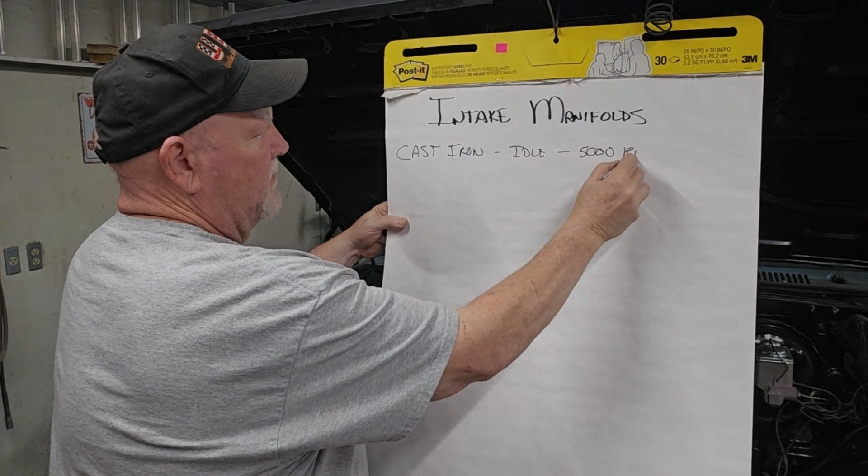It was idle, no matter what it was, to about 5,000 RPMs, and that was your power band. It would run smooth all the way up to about 5,000 RPMs, then it would fall off on its nose, because that's the limit of its range. If you're on the street, back in the day, that was really good. It idled good, it was smooth. You put a pop can on the breather, it was nice. But it wasn't very efficient.

As we all know, an engine is just a big air pump, so if you can make it flow better going in, that's going to make more power. So your first range is going to be something like Edelbrock Performer, whether it's a spread bore or a square bore from the factory. But that's just a first step, entry level intake manifold, and it's a good performer.

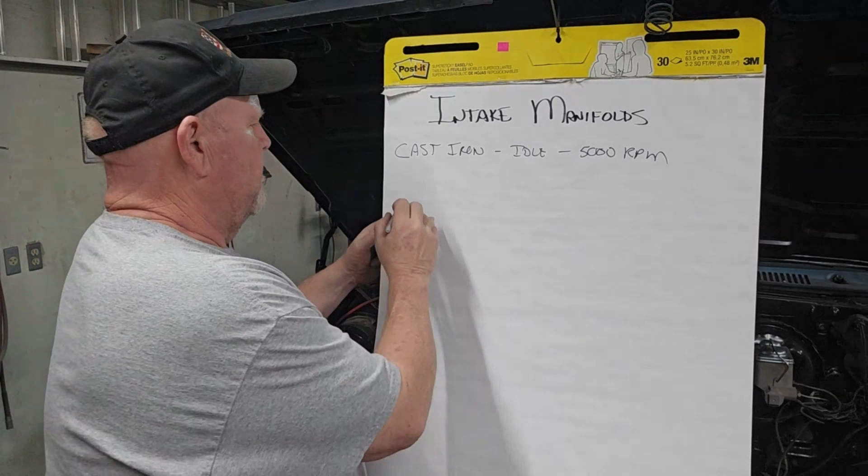All the companies have one of these. It's a split plenum, so it splits it in half, and it feeds half on one side of the carburetor and half on the other side of the carburetor for a 4-barrel. It just kind of crosses them over, and it's good for low end use.

So a performer style, a dual plane, is going to run good from idle to about 5,500 RPMs.

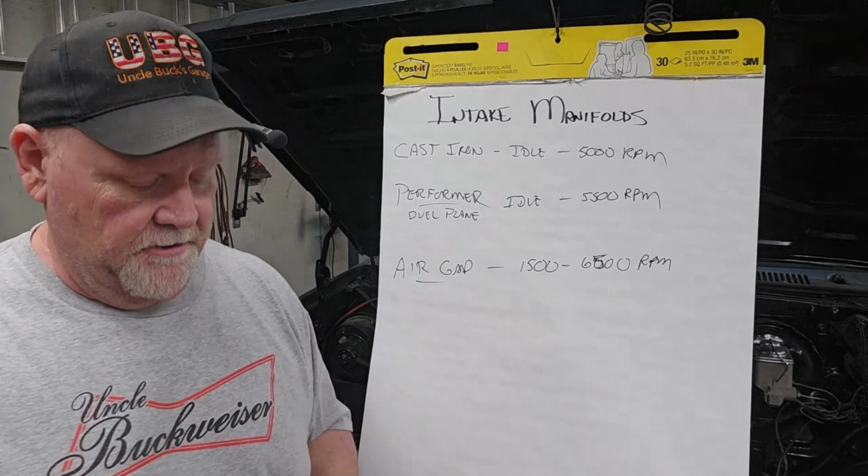So idle to 5,000, idle to 5,500, 1,500 to 6,500. Which if you're running double duty, running on the street and running on the strip, and running a big cam, then you're probably going to want to go with air gap. They're not bad intakes, I've had them too.

Those are definitely, when you swap them from, say, the cast iron, you go straight to an air gap, you're going to notice it on idle. You're going to notice it taking off because it's going to be cumbersome. It's not going to be crisp, it's not going to be clean. You're going to have to do things with the carburetor to get it to work.

There are going to be drawbacks to going that high of an RPM range on the top end. Now, once you get past that and you're cruising, it comes on like gangbusters, and it really works well. But again, if you want nice cruisability and idle quality, this would be the way to go. But if you want something a little bit hotter, then we'll go with the air gap.

All right, the next one we're going to talk about is an open plenum. My preference—they all make them, Holley makes them, Edelbrock makes them, Victor Juniors—but my favorite has always been Weiand. Weiand Team G's have been my go-to for 40 years.

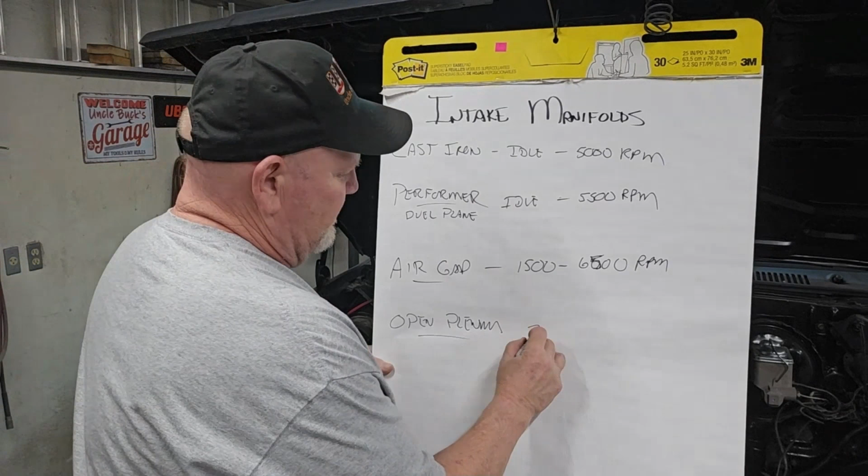So an open plenum is going to be, this is a harsh one, 2,800 to, let me see if I'm remembering this right, 7,200 RPMs. Again, we're right back to that 5,000-ish envelope. Now, this one's not going to idle good at all.

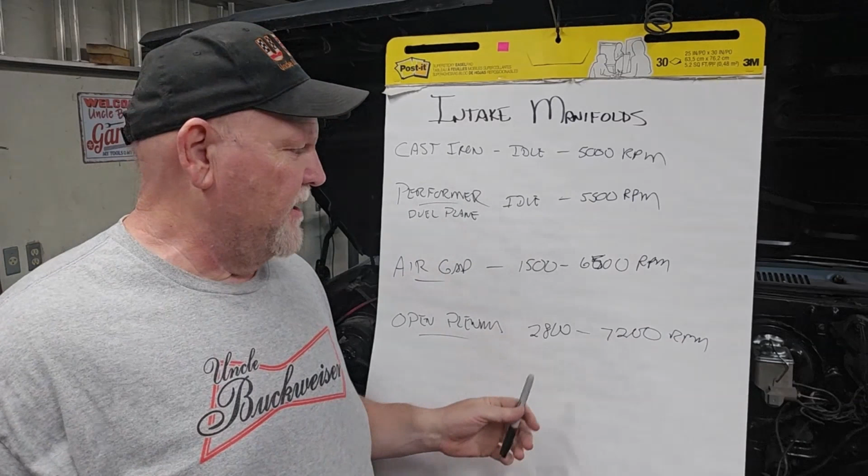But if you have a light car and you have, say, a 3,000 RPM stall in it, and you have a nice big carburetor—which this is going to take a lot of carburetor to fill that volume up to get enough when you're taking off and you're foot-stomping it—this would be the way to go.

If you're running on the street, I don't recommend this on the street. I have run them on the street and it was not fun. You're always tuning, you can't quite get the idle mixture right. It's hit and miss. It's going to be boggy off the bottom, but once you get into that RPM range, it's going to come on like gangbusters.

This one right here, I would consider it strictly a drag strip type intake. I wouldn't recommend running one of those on the street because you're not going to have good idle signal. It's not going to have good dispersion between the cylinders unless you get up in the RPM range and you're singing. That's when they really work.

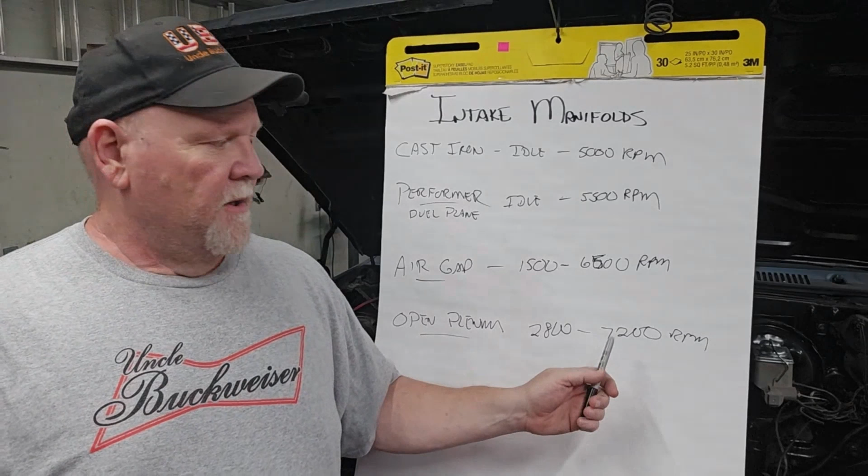If you got one that'll sing up to 7,000 RPMs and you're going to the drag strip on a regular basis, this is your way to go. This is the way to go. This is the key to it.

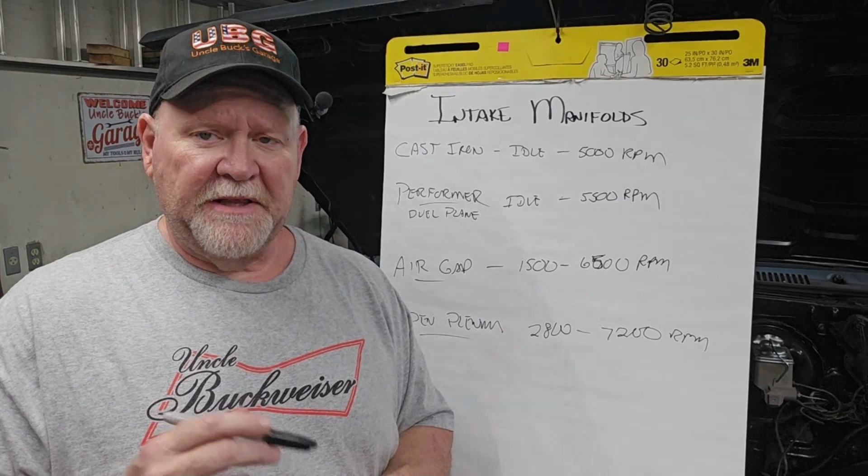Now, the last one—and this one surprised me, because I never really looked it up, and I've had several of these on street cars, and they always seem to work. They're not supposed to work, but they always seem to work. And we're talking about tunnel rams.

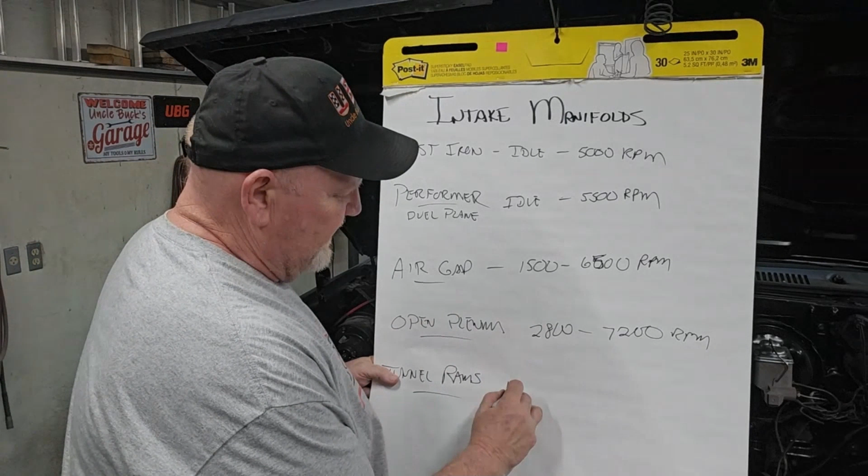As far as I know, there's only—unless you want to spend big money—only two companies still making these: Weiand and Edelbrock. You can still get some old classic Holley ones, but Weiand and Edelbrock, you can buy a new one. And they run, and this one surprised me, 1,500 to 8,000 RPM range.

Once I looked it up, it explained everything to me, because I have run a couple of small blocks and a big block on a tunnel ram with 2 4s, and they seem to idle better than the Team G's. That would explain why. I don't get that number, I don't see how it works, but that's from the book, from the company.

I looked it up on both their websites. From the company, that's the RPM range that a tunnel ram with 2 450s or 2 600s on it—that's the RPM range. Which is why it was always easier for me to tune the idle and to come off the line a little better, and just drivability.

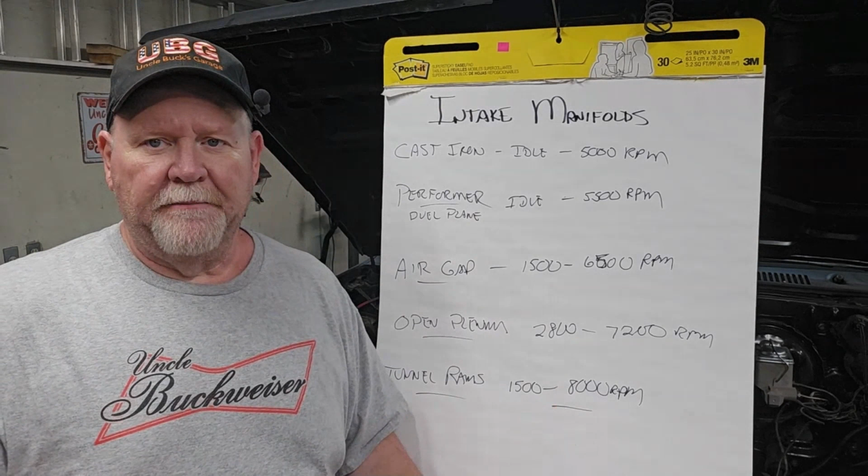You wouldn't think that a tunnel ram would be more docile on the street than it actually is, but I've done it, and it's true. That's because it's got that huge RPM range. Especially on a big block, though all these are small blocks, the tunnel ram was righteous.

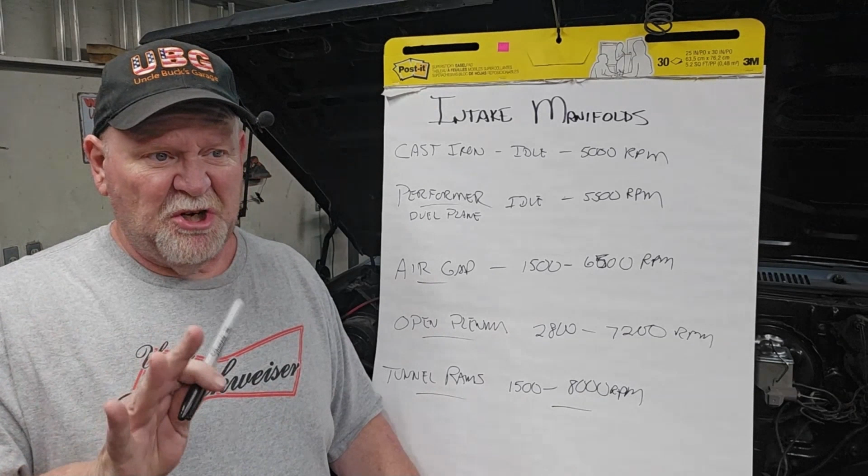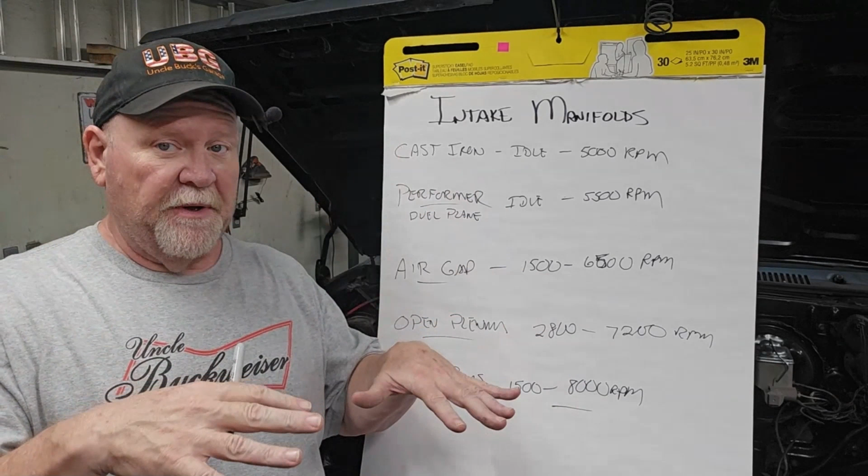I had a 3,000 RPM stall, 373 gears, 3,600 pound car with a tunnel ram on it with 2 450s, not vacuum secondary, 900 CFM off idle. I had to put big squirters in it, 50cc squirters on both those 450s to get enough gas once you slammed it open so there wasn't a big hole. I had to play with the power valves and stuff too.

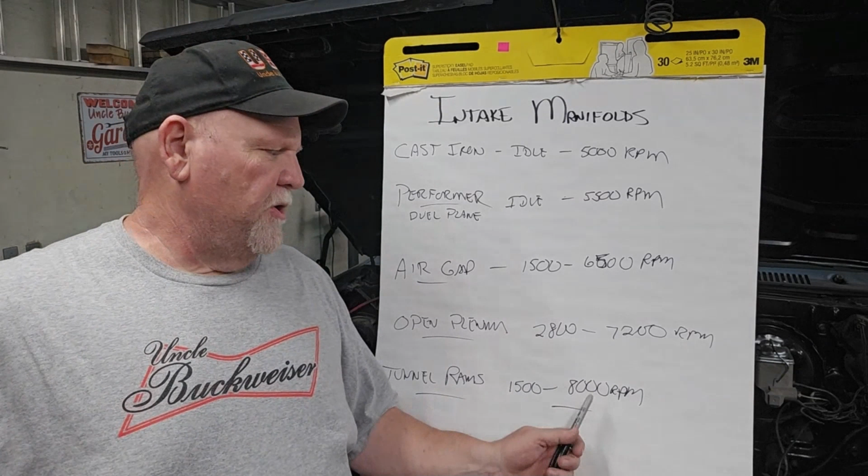That car was much more fun to drive with the tunnel ram than it was with the Team G, which I put on after the fact. I thought I was overdoing it because I didn't have the money at the time, and I was running a stock fuel pump, and that thing would run out of gas in the bowls about halfway through a run.

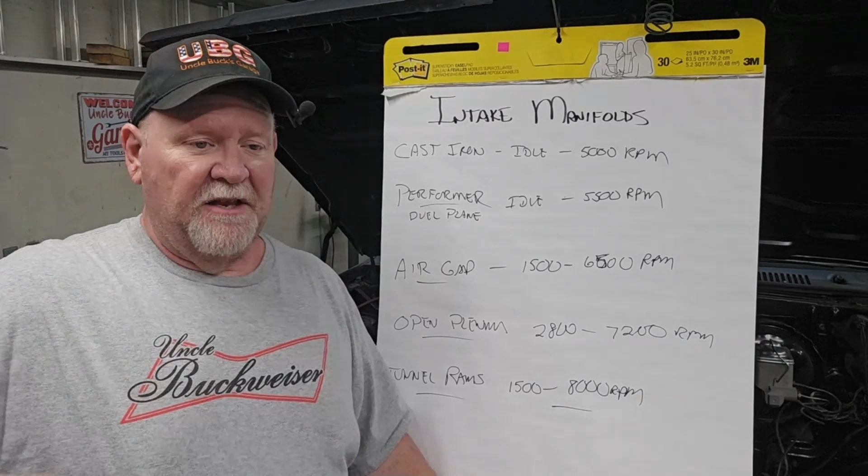Then it would just nose on its face, and you could watch the fuel pressure gauge just dump to nothing. Then after a couple of pumps, after you're off of it, it filled the bowls back up and it came back on. It was completely aggravating.

So that's why I decided to go with a single carburetor, because I was going to go bracket racing. I went with the single carburetor and the Team G, and it was completely noticeable, the difference in idle quality at 1,000 RPMs. It was a completely different engine on idle, but it's all kind of what you're into.

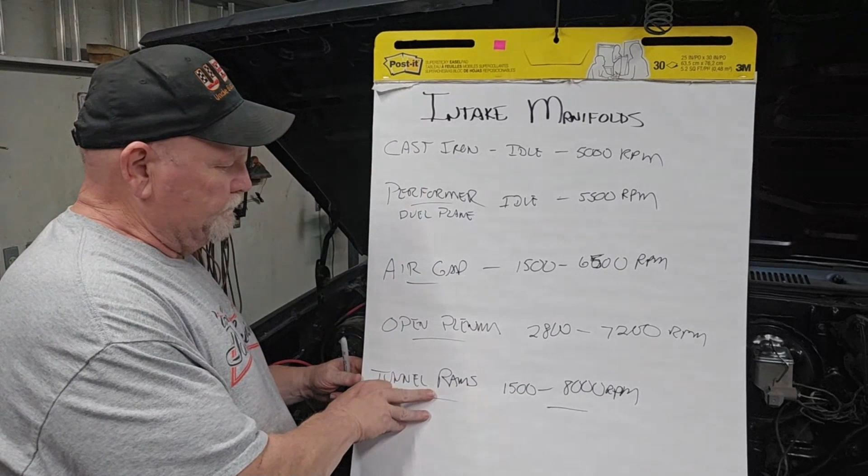So going off this, how would I set up the next one? We've got our RPM ranges, but there's considerations to everything: engine weight, rear end gear ratio, stall in the transmission, size of engine, compression ratio of engine. All kinds of things are involved.

Let's say we're talking about just a stock replacement car, like this truck. It's going to weigh about 4,000 pounds, with a 310 or a 333 rear end, and a stock transmission, nothing special. With that, I want better idle quality, I want better torque out of the back end, I want better things. So I would go with the Performer, for the RPM range which is what it's on. That's why I kept it on it.

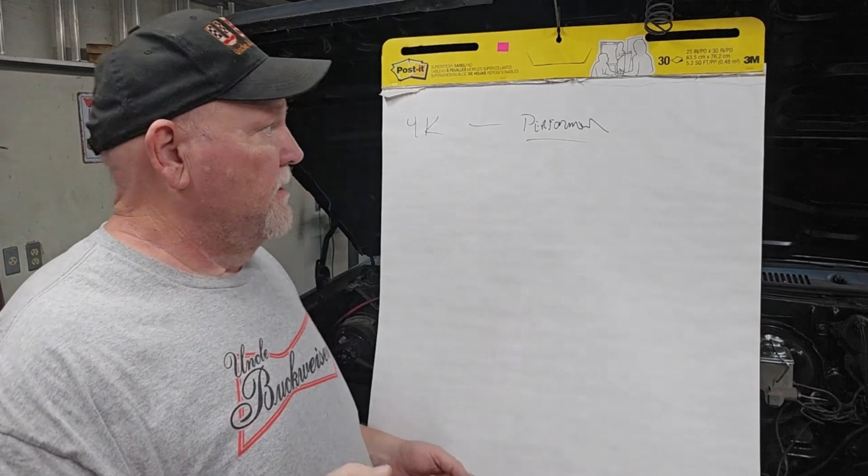Now, other consideration: say you have a car that weighs 3,400 pounds with a standard transmission, a 4 or 5 speed, with a 373 gear ratio and posi. You've got a couple choices. For fun, for drivability, you go air gap because you're going to be revving it coming off that clutch. So the air gap would be one, or for fun, tunnel ram.

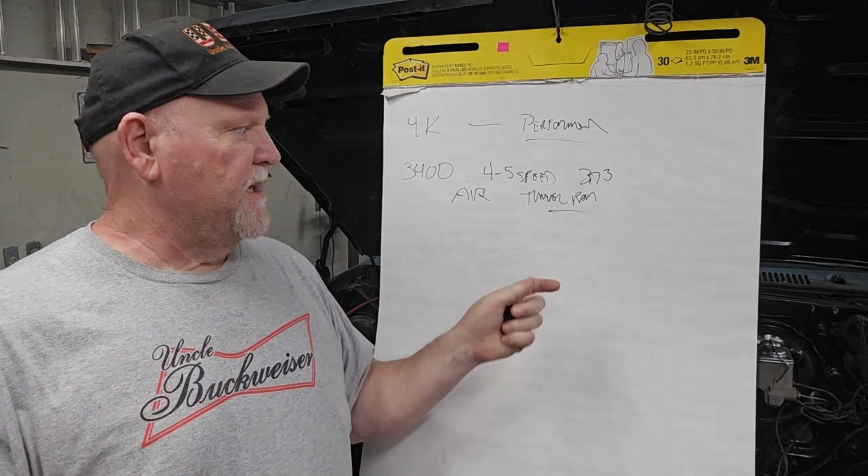I'll tell you why. Same thing, you're 1,500 to 8,000 RPMs, you've got a 373 gear ratio with a light car. You don't have to have a lot of horsepower or torque on the bottom end to get it moving, because that 4 and 5 speed is going to handle that for you, since you're revving it up and dumping the clutch. You're not in that RPM range of idle, you're going to be in that range of 1,500 and up.

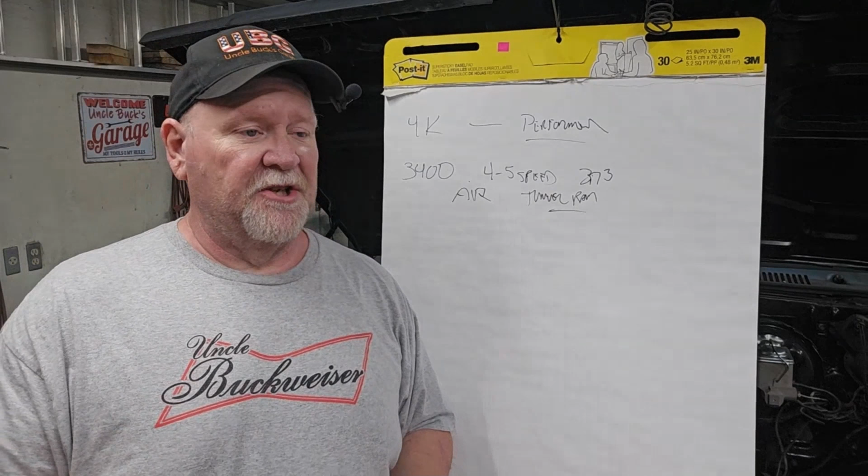So there are different things to think about. A big block on the street is going to rip tires apart, you ain't going to get traction. Then you're dealing with the same kind of thing, trying to tone it down off idle and get all your power once you're moving. Same thing, say a 3,800 pound car with a big block.

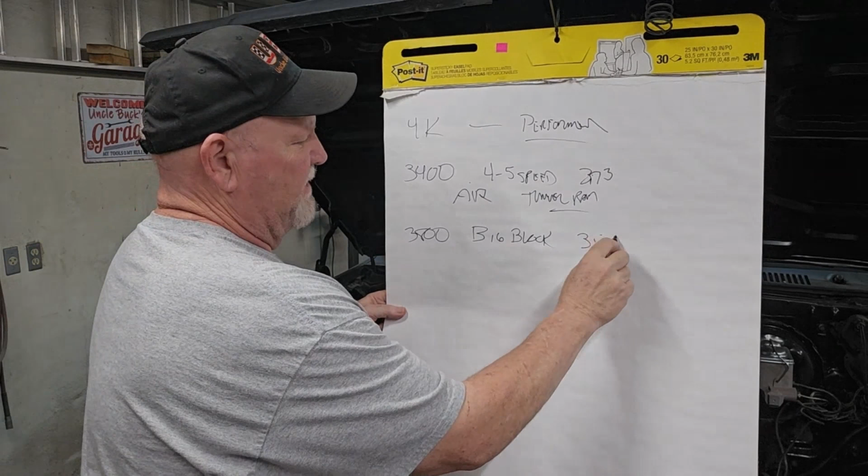With, we'll say, 355 gears, nice in between highway and street run around. All right, so 3,800 pounds, big block with an automatic. We'll say with an automatic.

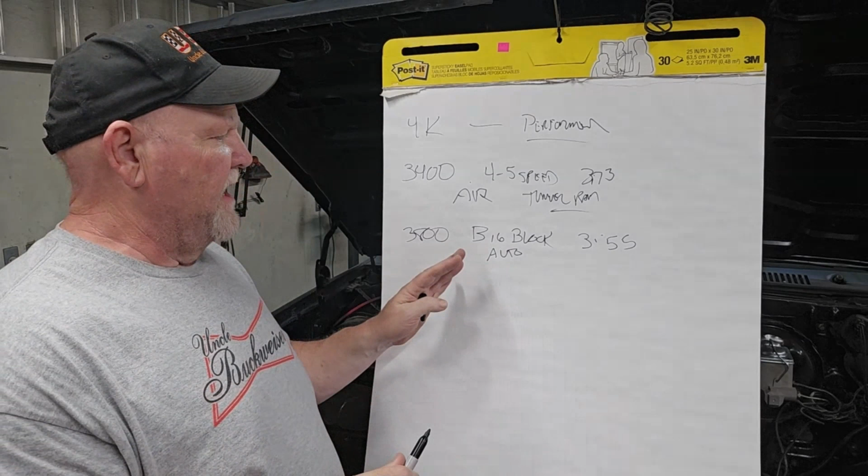I would say air gap with that, because it's going to have so much torque because of the size of the engine that it's just going to rip tires off of it. You're just going to be going up in smoke. Even if you're a posi, you're just going to be ripping tires up. So you want to soften it off of idle and then bring it on later.

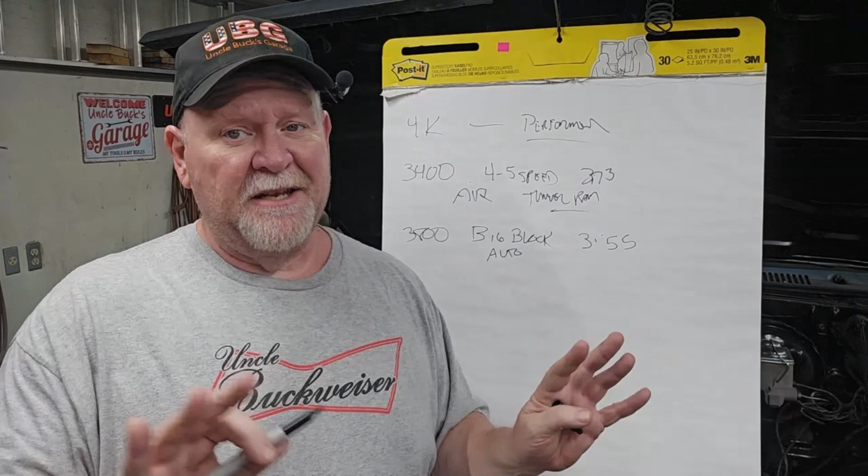And a stock valve train on a big block isn't going to handle anything above 6,500 RPMs. It's just not. I did it on mine, but I had done a little work on it. My average was 2,500 to 5,700 going across the strip. I had it geared right. It would do it all day long. Did it for six years and never turned a wrench on it. It was great.

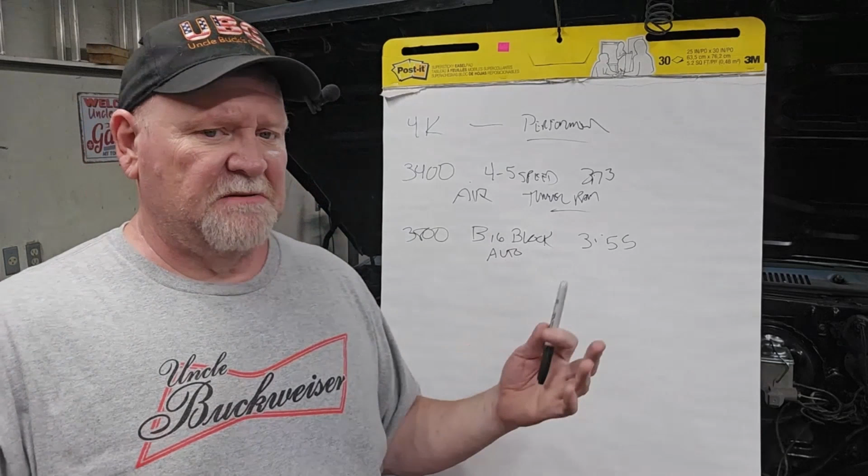Comment down below if you think that I'm just wrong, which I get a lot of that kind of stuff. I mean, I'm just an old guy that's played with this stuff for 40 years. I'm not a wizard, I'm not a guru. This is just the things that I've done, and the things that I've learned through trial and error, and a lot of error, of how to make things work better for yourself and have more fun with your hot rod.

And your classic, just have more fun. That's what this is all about. This is not max horsepower. This is not technical. This is, let me put something on and have some fun to make it run better, to say I've done it with these two hands and I'm making it run better.

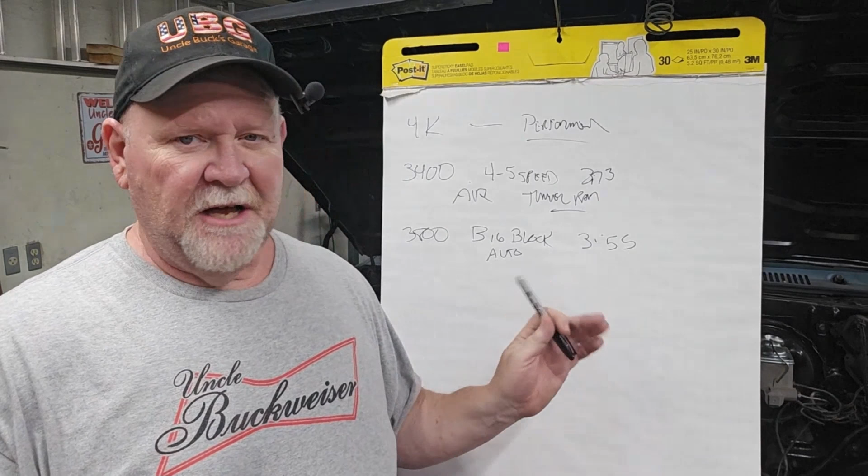But, and this is just me because I've done it several times, two 4-barrel carburetors sticking out of the hood of a tunnel ram doesn't get any cooler than that. That's the stuff that gets everybody to stop and talk to you at the car show, or on the side of the road, or at the bar, or wherever you're going to, at the gas station. Everybody's going to see that, and everybody's going to come over and talk about it. That's going to, a tunnel ram sticking out of the hood will get attention. Basically anything sticking out of the hood is going to get attention, but there's some coolness factor about a tunnel ram. You just look at it and go, it's guttural. It just brings that dude out in you.

So, like I said, just comment down below. You ain't gonna hurt my feelings. I'm a grown old man. You can talk trash about me all you want. I don't care, doesn't bother me a bit. That's what this is all about. It's just about having a conversation about what could be fun. I think a tunnel ram may be in my future. May not be the soon future, but I'm going to have me another one.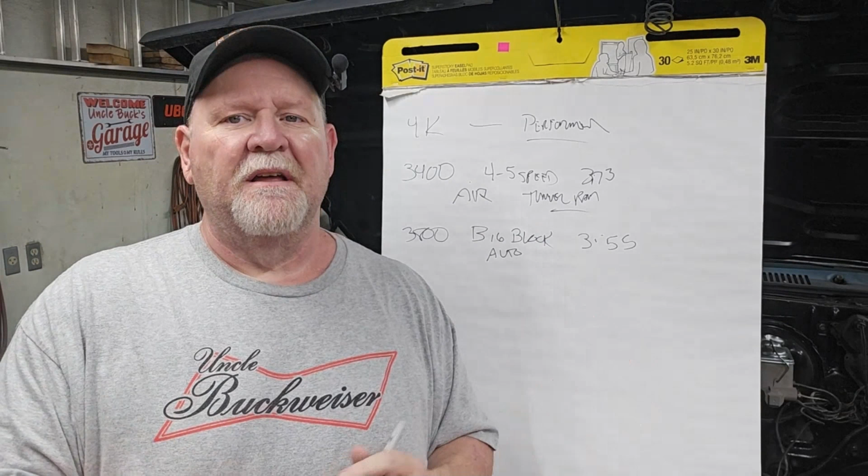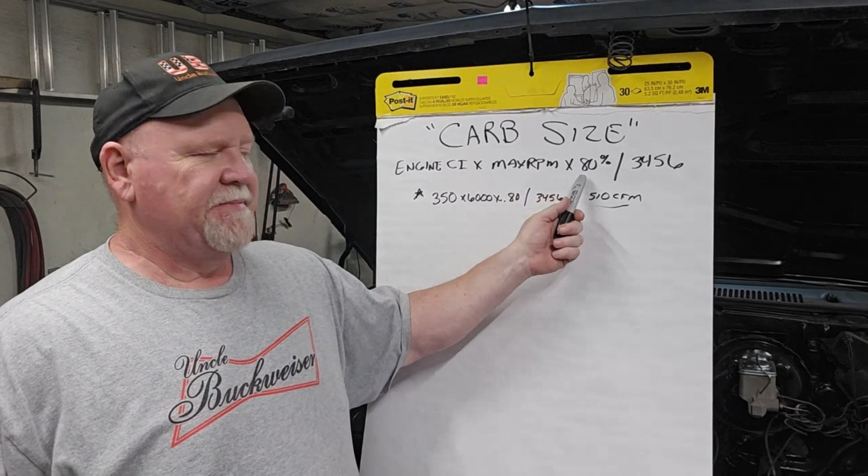Divided by that number, okay, that number is everywhere. So that's the equation that they give you, all the people that's supposed to know what they're doing, and all the books and online. What that translates to is a 350 cubic inch engine at 6,000 RPMs, which is about right, at 80% efficiency. They're not that efficient coming out of the box. Divided by 3,456 equals 510 CFM. 510 CFM is what the book says that engine should have to make it run correctly.

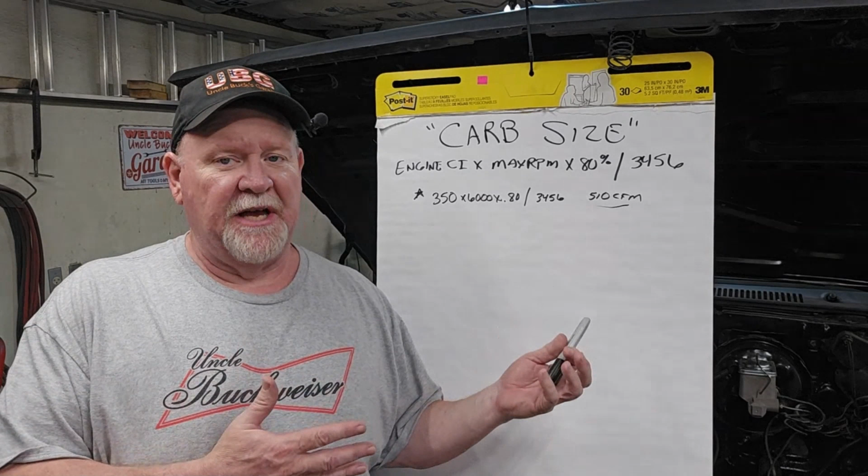Okay, then if that's the case, why in the 60s and 70s did they come out with a 625 CFM Quadrajet? And an even bigger one on a high-performance engine that actually got Holleys. And they actually produced a 750 or 800 CFM Quadrajet for the big, heavy trucks and stuff. So with 350 cubic inches, which, okay, so that already doesn't make sense.

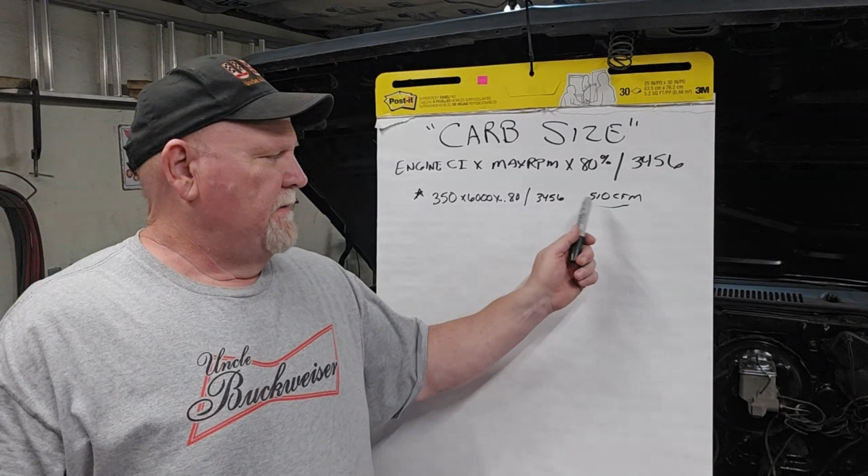That one, I feel, on a stock engine might be somewhere close, okay? But the question about the whole thing is that 80% efficiency. I don't think on a stock engine with stock heads, smog heads, I don't even think it's close to that. I'd say it's more like 60% efficiency. It's not running as efficient as it could. It's running at 60% because they got them choked down for emissions through the 70s. They basically killed them.

Say you're in the middle of a build, and you're going to use some mildly pocket ported heads, and it's going to flow better. You're going to have an intake and headers on it. So it's going to flow better in and out, it's going to have better numbers through the head, so it's going to be more efficient.

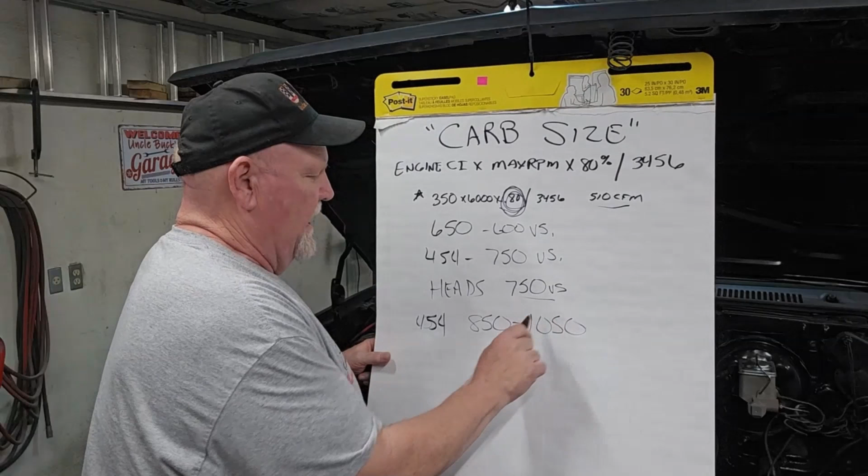I don't know if they still make them, but I think they used to make an 850 vacuum secondary for the street. But basically once you get this big, they're going to be all in all the time - dual squirters, all four corner adjustment, the whole nine yards.

And once you go to a certain level, it gets where it's not very streetable. But with say a Team G intake on a big block, and high dollar heads - we're talking thousands of dollars for a set of heads with all good hardware, brand new stuff, aluminum - it's a huge weight saver. You can definitely use this much.

It's got to have the air, because it's a big air pump. Got to have the air. So with a nice set of heads on a 454 or anything bigger, you're talking about at least 850. Anything past 454 - 502, 540, 565 - you're a Dominator plus.

Now, I'm old school as they come, and I can remember the 60s and 70s seeing these guys running small blocks, or even the pro stock guys - because they were regulated to 500 cubic inches, right? And they're running two 1150s sideways on a tunnel ram, doing it right. Now they were spinning those things up to about 7,500, 8,000 RPMs.

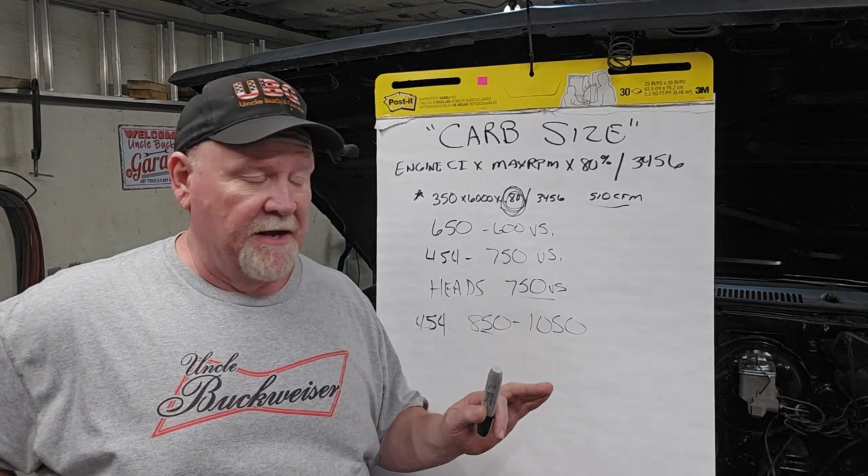And it worked great. And the other thing, like with the big block, the 454, like we've talked about in another video about intake manifolds - that makes sense with the tunnel ram, with two 450s, 900 CFM. It's right in the center, right there, 900 CFM, with a tunnel ram.

Works perfect. It fits right in the glove, to me.

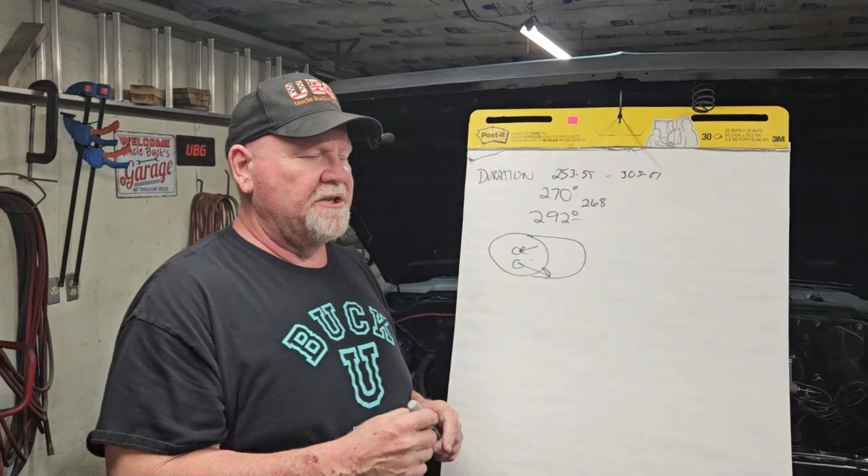I put a vacuum reservoir in my car where the charcoal canister was supposed to be, and ran a vacuum line from the intake to it and then back to the brakes to make the brakes work. It took about 2 days of driving, and it finally held a vacuum. It's like a vacuum reservoir, and once it held enough vacuum, the brakes started working. That's what you had to do if you went above 270 duration—you had to get a vacuum reservoir, or else it would not work.

On the street, day-to-day driving, you would have no brakes at all. It's like back in the day, if you lost power, hitting the brakes with the engine not running meant no vacuum. It was dangerous—that's how accidents happen. So that's what you had to do back in the day.

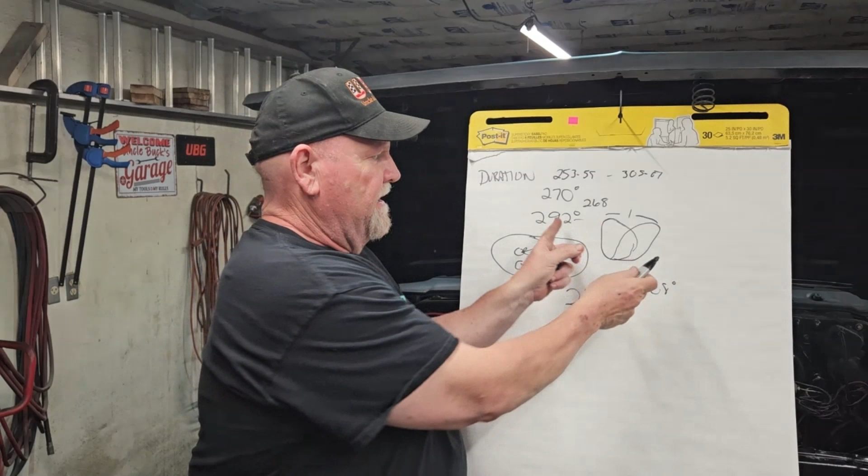Now, I've seen guys run 280 duration cams and still have vacuum, but that was because of a narrow lobe centerline. A lobe centerline on a camshaft is the centerline between the intake and exhaust opening and closing. With the 292 cam I was running, it had about 112 to 114 degrees lobe separation. If you can get a cam with, say, 280 degrees duration and a lobe centerline of about 108 degrees between the two lobes—tightening this up—it's a lot more vacuum sensitive that way. So you could theoretically run a 280 duration cam and still run your brakes if you got a narrow lobe centerline.

But I didn't do that back then—I had to get the canister. There's more ways to skin a cat than a lot of people let you think.

In the new one I built, the $500 rebuild, I put a 292 duration cam in it with a lower centerline, because I know this one's going in, and if it goes in, whatever it goes into, it's not going to have power-assisted brakes—it's going to be manual brakes, which doesn't require vacuum. Now we've decided you can get 280 degrees if you go 108 or 107 degrees centerline, but right now 270 is as high as you can go on the street without having to play around—you can just put it in, set it straight up, and go.

So we've talked about duration, we've talked about vacuum signal, now we need to talk about lift. When you're running a street engine at less than 6,000 RPMs, the difference between 465 and 480 lift is not that much—that's fifteen thousandths difference, and you're just talking about that much.

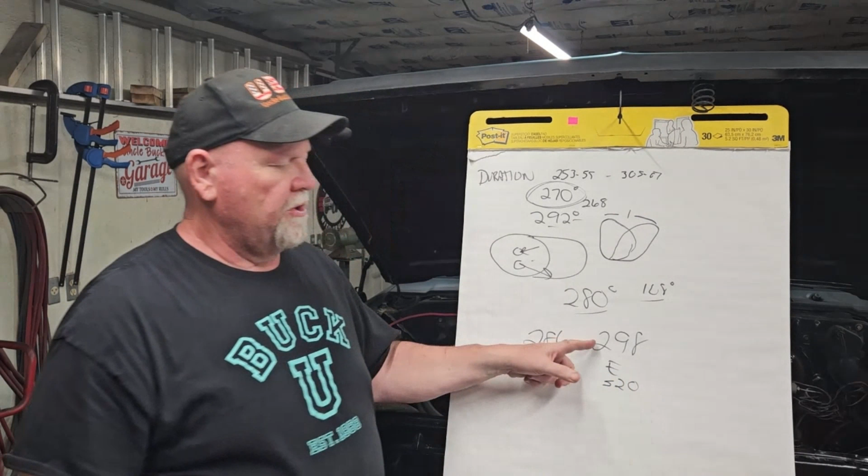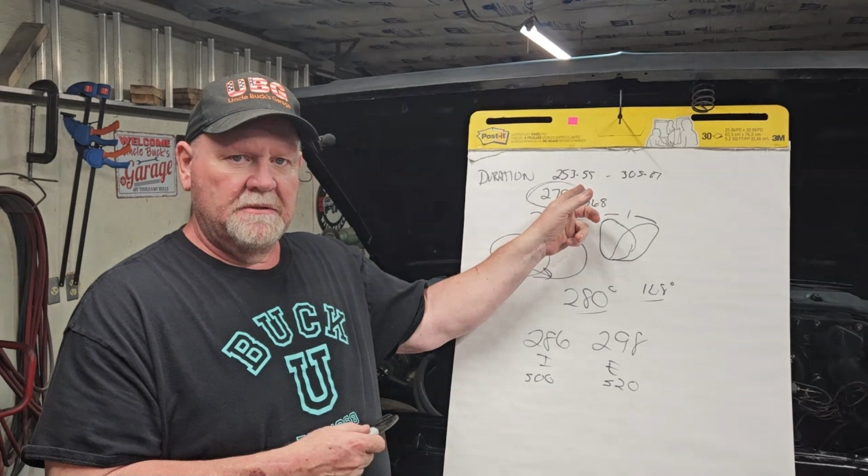The thing about this is it really thumps hard, it sounds great, especially with a big block. Small block, yes, but with a big block, that kind of cam just thumps. The intake lift, just using a general number, was say 500 because it was a big block, and the exhaust lift was say 520. So it had more duration and more lift on the exhaust, which helps clean the cylinders out and makes it more efficient - better air in, better air out, like a big pump.

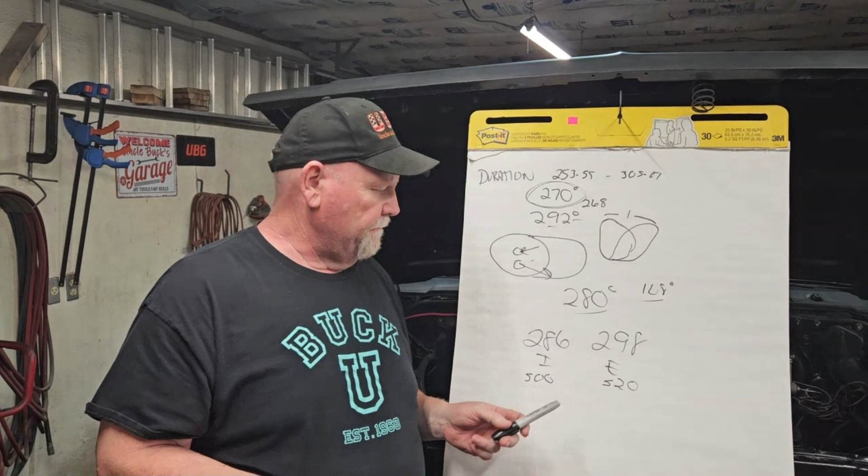This was a dynamite cam, the cam that I beat on for 6 years of bracket racing the big block Camaro. Never had to turn a wrench on it, but I did have roller rockers on it. I did run them like once a year - I reset them in the spring before we started racing. But that was it.

That's a split duration cam. That one also had, because I was going to use it at the strip, a stall in it and all that kind of good biz. I think it was 112 degrees lobe separation as opposed to 108, because I didn't even run vacuum accessories - I had taken the booster off of it. It was manual brakes, didn't have any heater system in it. I caged it out. It was a bracket car.

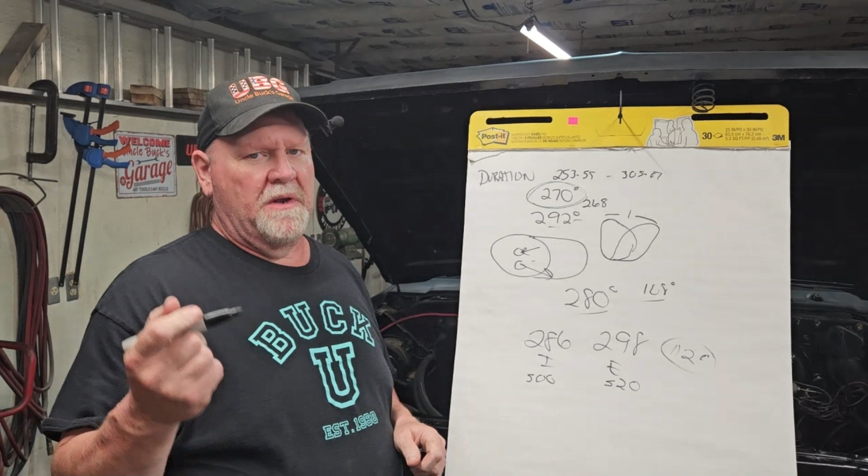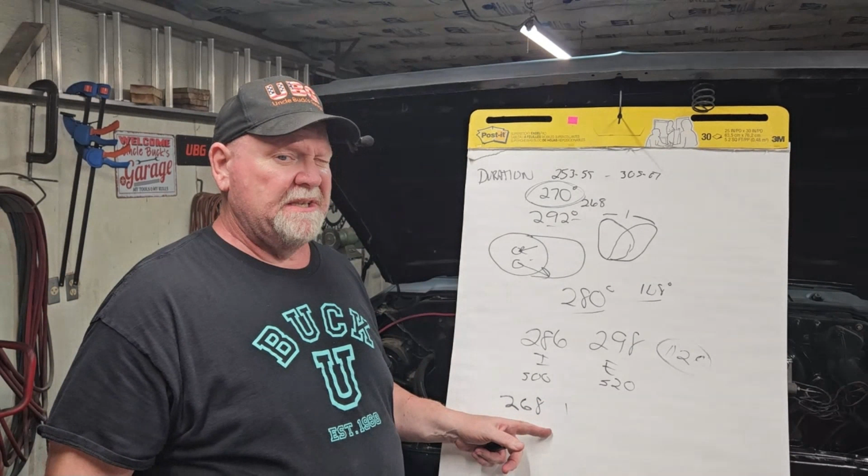So today, if you ask my advice, what would I tell you to buy? If you want something that's fun to drive, reliable, easy to go, I would go a 268 duration cam straight up, and that's going to be about a 465 lift, and you can put that in dot to dot. You don't have to degree it or do anything, and that'll run all your brakes, your accessories, and everything.

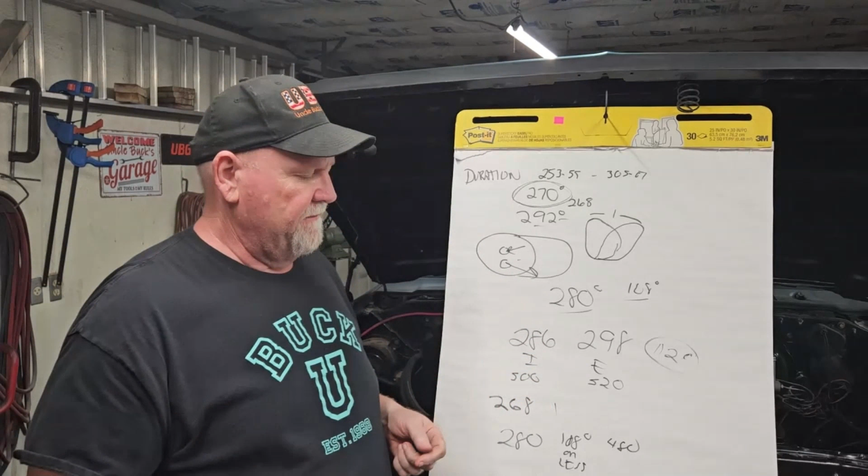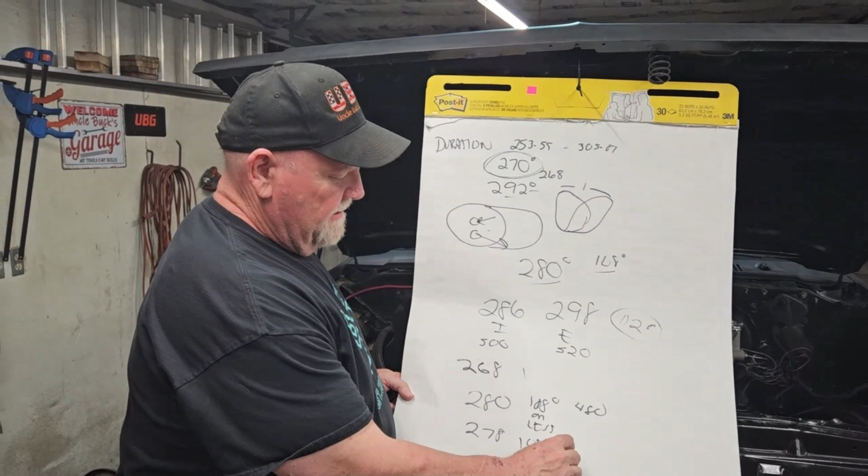If you want to go a little bit spicier, I would go a 280 degrees duration, 108 degrees or less lobe separation, with about a 480 lift. Or if you wanted to get a little bit spicier, you could go 278 duration at 108, and then on the exhaust you might go 286 with the same 480 lift, which will scavenge the exhaust out better and make it a little bit spicier, but because of the lobe separation it'll still have enough vacuum to run your accessories.

And that one will sing - that cam will sing. That cam will sing too, but not as throaty as the other one, because with the extra exhaust duration, it really does pump through the pipes and sounds really tough.

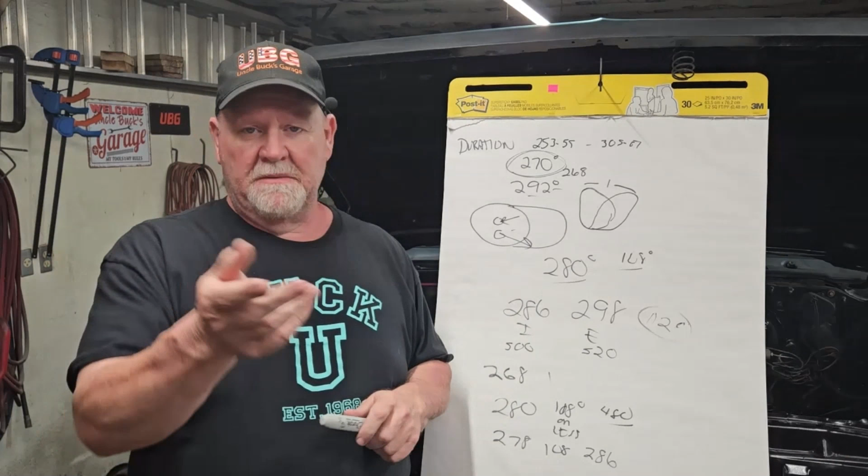Street racing, 60 styles, everything thumping, Camaros, Chevelles, all that stuff. It brings back all those memories. You say double humps, you don't have to say anything else. People automatically, bing, goes in their head, right? When they first came out 50 years ago, okay, they were really good. They were good numbers, they flowed good.

They made good power, you know, they produced thousands and thousands of them, but technology has come on for the same CC size and for the same, basically the same valve size and chamber design, the whole 9 yards. Okay, flow numbers for a double hump head at 500s lift, which I usually run a 480 or 460 cam, so we're just going to use 500. Everybody does it by, you know, 1, 2, 3, 4, 5.

So .500-inch lift cam. Okay, flow numbers for a 202 is 202 CFM at 500 lift. Okay, we'll just go, what's on the market right now? Everybody's talking about AFRs, the 195. The 195 ports, they just came out with the 200s, but the 195 ports, which are basically the same port size and shape and configuration as a 202 head, they run...